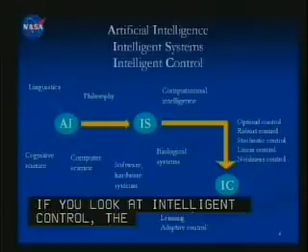If you look at intelligent control, the concepts in control are very old, maybe 400, 500 years old. But the ideas that intelligence is drawn from are relatively new, starting with artificial intelligence. Artificial intelligence as an idea is about 50 years old, and it has taken many elements of cognitive science, psychology, philosophy, and so on.

And of course, computer science came along to boost its applicability to many different current engineering systems, and that gave birth to this idea of intelligent systems. Many folks will consider intelligent systems as a kind of rational artificial intelligence, trying to make machines perform better than what they are capable of.

Some of the ideas in intelligent systems that are new and not so much in traditional AI are the idea of biological systems, looking at biology as an inspiration, also modeling abilities. Software and hardware revolution has taken place that's made implementing some of these very complex algorithms much easier. And finally, intelligent control does have traditional control features such as robust control, optimal control, but also has brought in some of the new ideas in predictive, adaptive, real-time optimal, and learning and planning down to an implementable level in hardware and in real systems.

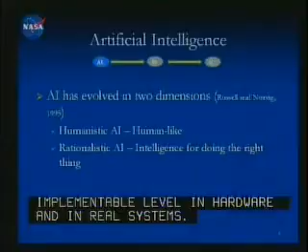AI, like I said, is quite old compared to intelligent control. It's evolved into two areas. One is looking at humanistic AI, trying to model humans and understand how humans think and behave. But the one that is closer to an engineering application is the rationalistic AI, that is using what we know about intelligence to do the right thing from a machine point of view.

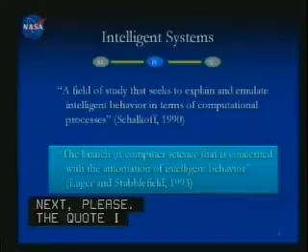Next, please. The quote I like shown at the bottom that's more relevant to intelligent systems is the branch of computer science that's concerned with the automation of intelligent behavior. So how do you automate the intelligent behavior as we know it to make the machines better than what they are?

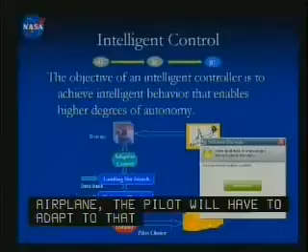It's a good way to illustrate higher degrees of autonomy. We do have a pilot in the loop, and the airplane suffers some kind of damage or an upset condition. A typical current generation airplane, the pilot will have to adapt to that condition, and sometimes the time frames can be quite small, down to almost a second type adaptation. So the pilot has to work harder, and in addition to that, he has to manage his resources, so there is quite a bit of workload on the pilot.

Now, when intelligent control comes in, the first thing it can do is adapt to the damage, provide stability. Stability is one of the events that needs to happen down to sub-second levels, and that takes away some workload right away. So that's one degree higher autonomy—the pilot is not really directly controlling that aspect of it.

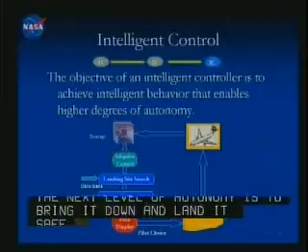The next level of autonomy is once the airplane is stabilized, we still have to bring it down and land it safely, so there are many little pieces that need to happen. One of them is trajectory planning. Now that I have a reduced envelope after the damage, the aircraft needs to figure out what it has and come up with a plan that will safely land the aircraft. So here is another level of autonomy that's provided to the pilot, and the pilot can then opt to either use it or not use it. And that's the idea of having that variable autonomy as an option to the pilot.

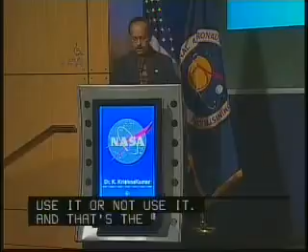So intelligent control, once again, I think of it, the objective is to achieve intelligent behavior that enables higher degrees of autonomy. This may be more relevant to aircraft as a definition, but that's the field that I work in, so it fits well. I will also show you—can you go to the next slide, please?

There are other ways to quickly define intelligent control. I'll show you a couple of ways you could do it—these are the ways I've used to communicate. If you look at controlling any system, we need two error signals. We need to get an error signal that shows you what is the difference between desired and the output of the system.

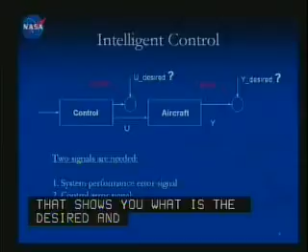So sometimes even the desired is not clear. That's where the goals come in, the planning comes in, and even intelligence can play a role. And once we know what we want to achieve, how do we get that in control? What is the error in the control activity? So that's another signal. Intelligent control can be thought of as a way to generate these signals to achieve higher intelligence.

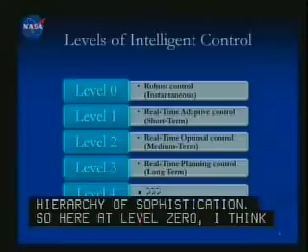Another way I've used to define intelligent control is using typical levels you might have seen in many areas, shown as a hierarchy of sophistication. At level 0, I think of it as robust control, which is kind of an instantaneous gain feedback controller. At level 1, you are adjusting the gains of the feedback to get better adaptation to the current situation. From level 1 onwards, it's almost happening in real time - online, with error correction, optimality, planning, and so on.

This level you can keep going further down or higher up to achieve higher intelligence. We have used this hierarchy when we guide our research in intelligent flight control.

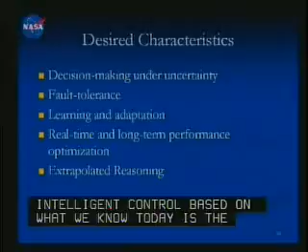Some of the desired characteristics of intelligent control based on what we know today are decision making under uncertainty, fault tolerance, learning and adaptation. The 4th bullet is a very interesting concept - it's playing a bigger and bigger role, which is where, towards the end of the presentation, I'll talk about brain-like intelligent control. That's where we want to go: real-time and long-term performance optimization.

Can I optimize as I'm flying? These are very applicable to even space travel, for example, where if you have onboard capability to sense the trajectory, then you can do long-term optimization. And finally, extrapolated reasoning.

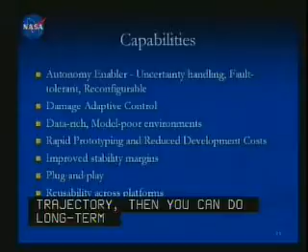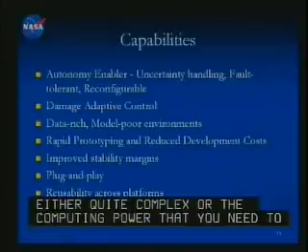So some of the capabilities we are after: autonomy enabler, I already mentioned that. Damage adaptive control. The 3rd bullet, data rich, model poor - I think you will see more and more that sensing is sometimes easier than physically modeling an event, mainly because the physics is either quite complex or the computing power needed to model that physics may not be available for real-time applications. So sometimes it may be easier to sense and control based on what we sense, similar to what biological systems do, and intelligent control as a capability has that aspect to it.

Rapid prototyping and reduced development cost - I can say from my experience, I can go from one aircraft to another, completely different classes of aircraft, and design an adaptive intelligent control in a matter of days. So that kind of quick prototyping is possible. Improved stability margins, that's one of the aspects of safety we are going after. And I'll talk about plug and play and reusability.

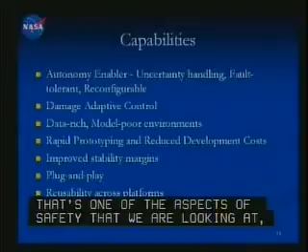Hopefully that gave a feel for what intelligent control is and what we are trying to achieve in terms of capabilities using intelligent control. So next few slides, I will talk about applications to aviation safety and next-gen designs.

If you look at aviation safety, of course, it has many requirements. Control is one piece of that solution. But in terms of control, what are we seeking? The capability we are looking for, if I have to say it in one word, is safe landing - kind of bring it down and land it safely. But to achieve that, we need to first understand stability, because that's the first thing that needs to happen. I should be able to recover from loss of control, in the sense understand how to maneuver the aircraft, and at the same time provide handling qualities that are consistent with what the pilot expects, so there is no confusion while doing all of this to the pilot.

The motivation is simple. I've shown 3 pictures here, but you can get many pictures out of the web of incidents and accidents that have led to the desire to help the pilot. Fortunately, in 2 of these, the pilots survived and brought down the aircraft quite well, because they had the time and the experience to do it. The third one, the tail damage one, did not survive.

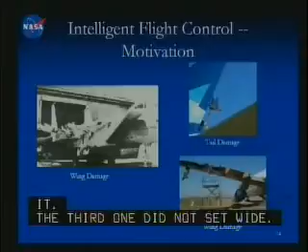The essence here is to understand that pilots who are trained can bring down most of these incidents, but there is no real ability to train for all types of incidents that might happen. The other aspect to safety is that many of these aircraft are built with redundant controllability, and we want to exploit that. So hopefully in the next few slides, I will highlight how we can exploit that.

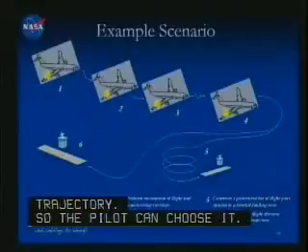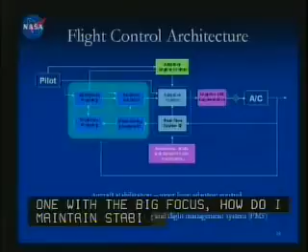How do I provide extra stability? But there are also questions like, can I use the engine as an extra effector? How do I have to design or redesign the engines to provide me an ability to control the moments from a stability and maneuverability point of view, beyond what is available right now?

And you see at the big block, which is all of the planning functions. I need to be able to do guidance, emergency planning, trajectory planning, and so on. So next, please. The next few slides I'll concentrate on adaptive control, and also on emergency planning. So those will be my two topics I will talk about. Under Resilient Aircraft Control Project, we are looking at all aspects from this architecture.

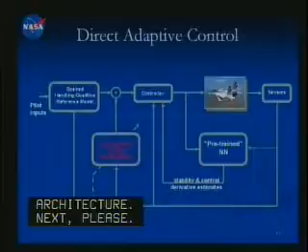Next, please. So this is one of the popular adaptive control architectures that came out of the research by Dr. Tony Calise at Georgia Tech. It's called the direct adaptive control architecture. It uses a neural network, that's in the red block there, to adapt to unforeseen events.

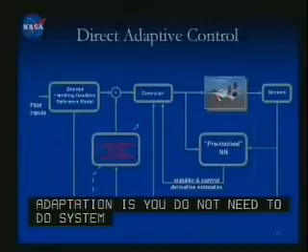The beauty of this direct adaptation is you don't need to do system identification. You don't have to spend any time IDing or identifying what has gone wrong with the system. And the benefit of that is it can accommodate many different types of incidents, not just wing damage or tail damage, but any combinations of that.

So it has a pre-trained neural net, or if you want to think of it as just a function that captures known dynamics before the fault happens, before the damage happens. So this is the current knowledge of what the system can do. And on the left, you see desired handling qualities.

So the pilot, when he interfaces with the airplane through the stick, is actually asking for desired roll rate, pitch rate, yaw rate, and through an expectation model, what we call the handling qualities model, what kind of a short period or the Dutch roll he expects. And typically there is a controller that takes that input, shapes it into control surface deflections that go to the airplane. And on the right, you see the sensing taking place.

Now at the bottom, we had those two components, the fixed neural net and an adapting neural net. Neural networks were used because they have their own nice features. I don't have time to go through that, but you can also use any parameterized function instead of neural networks.

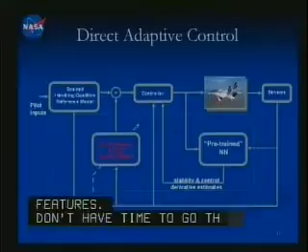Now, what we have done so far under the current safety project and previous projects is we have researched this architecture quite a bit. So some of the results I'll show you today include flight test results that were done at NASA Dryden, and some of the simulation work that was done at NASA Ames and Langley.

Now, let's move on to the next slide, please.

So if you look at the flight test results that were done so far, it uses an F-15 currently available at NASA Dryden. It's tempting to think of the F-15 as not very relevant to transport aircraft, but the beauty of it is you can take it to the edge knowing very well it's got the performance to come back.

So you can experiment with the high performance aircraft, all the features you're looking for, much more safely, since we have a pilot in the loop, than you could with the actual transport aircraft.

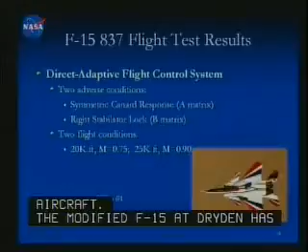The modified F-15 available at Dryden has two canard surfaces, the two surfaces in the front. Those are scheduled as a function of angle of attack, so we can actually modify that scheduling to create instability in the system.

So that's what we did. We took the multiplier that multiplies with angle of attack to the canard surface and messed with it, changed it to make it unstable.

What I'll show you is the video first, and then I'll show you a set of data. In the video, we have a short clip where you'll hear the pilot talk through what he's doing. As a quick preview, the first part you'll see is flying with no adaptation, in other words, no neural networks.

And in the second phase, he's flying with neural networks, or with adaptation. You'll see through his commentary what he thinks about the handling qualities. So this video will highlight the handling qualities from the pilot's perspective.

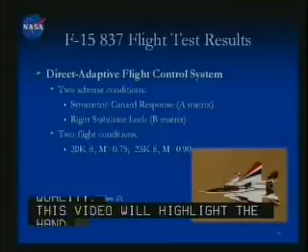And then I'll show you a set of data that highlights the stability as control engineers would like to see it. So it captures both the pilot-in-the-loop effect of adaptation and the stability.

Now, I do want to point out there's a temptation to say we could do a lot of this experimentation with unmanned systems, and that's true, we can do a lot of it. But when there's a pilot in the loop, it completely changes everything, because now we are getting into a realm where there are two systems adapting, the pilot and the software.

That interaction is poorly understood, and through experimentation we figured out even we don't fully understand it. Pilot-induced oscillation is one of those events that are not desired, and that's the thing we want to avoid when both the computer and the pilot are adapting.

So with that, let's move on to the video, please, and I'll keep quiet through the video.

Here comes the failure. Okay, failure's in. Just right at the edge of desired tolerances there, so we made it still. One more, a little bit aggressive. Same thing, right on the edge. I'm overshooting a little bit from where I want to be. Still making desired tolerances. Here comes one aggressive one. Okay, a little bit light in the seat. Here comes the failure. Okay, a little pitch up there. No PIO tendency, and just stopped it right in the middle of the position where I wanted to. Let's do a high to low here. Okay, perfect. That stopped exactly where I wanted it. Let's do one more. Okay, right in there. Actually, it seems like it's better going down. Let me try one more from the bottom position. Yeah, stopping it right there. We talked about that. Predictability, it seemed to be much more predictable with the neural networks on. Fine tracking is good. We're keeping it within about 5 mils. I'm happy with that. DV up to the north, or up to the forward. Bring the pipper back on. Okay, easily within side desired.

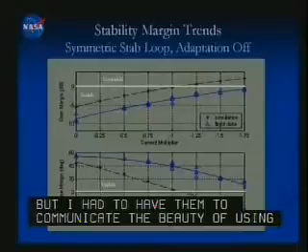I have two busy slides, but I had to have them to communicate the beauty of using adaptation. What you see is a typical control tool that we use to assess stability.

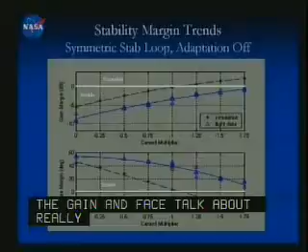This is called a Bode plot. On top we have the gain margin, and on the bottom we have phase margin. We want gain margins to be good, about 6 dB or more, and about 60 degrees of phase margin. The gain and phase talk about the sensitivity to modifications to feedback signals and time delays in signals. So the stable and unstable regions are very well marked there in white.

The blue line is the flight data. We flew several flights at various levels of destabilization, all the way up to neutral stability, shown on the right at minus 1.75 canard multiplier. The blue symbols on the line are the actual flight test data.

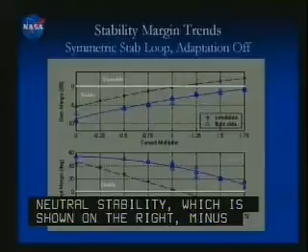Then on top there are black dashed lines. Those are the simulation data. Whenever we do our experiment, we first do it in our offices, then in a small engineering simulator, then in a full engineering simulator, and finally in the actual aircraft. The black line is a full engineering simulation where there is a pilot in the loop, and you can see the simulation does not capture all of the non-linearities that you get out of a flight test. So right there is one selling point for flight testing ideas, because you don't really capture all of the anomalies that you really want to simulate.

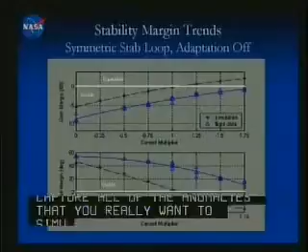In the next slide, I will show you the concept of consistent handling qualities, or consistent performance. You'll see how, when we have neural net adaptation on... by the way, this is without neural net adaptation. So when I turn the neural net back on, both simulation and flight tests will look very similar. Can we go to the next slide, please?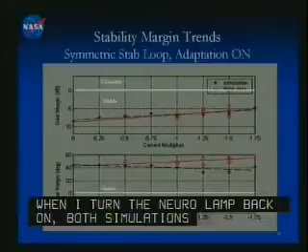Here there are two pieces of information. One is, by turning the adaptation on, simulation and flight tests behave the same. And the reason for that is the adaptation—it's adapting, making the simulator behave like the real airplane by adapting the handling qualities model, because the neural net is able to absorb all the non-linearities.

The other thing I want to point out is, the best place to see it is at the rightmost point. We have gotten back the 6 dB. Before, in the previous slide, we had 0 dB at the extreme right. Now I have minus 6 dB. So by turning the adaptation on, I got back the stability that I was hoping for.

So this is a big selling point for adaptation—you can gain back the stability that you lose by having a damaged situation. Can you go to the next slide, please?

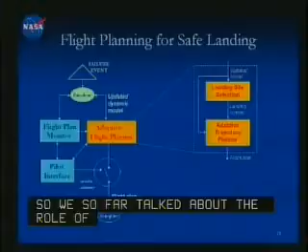So far we've talked about the role of adaptive control in providing increased stability. But like I said, stability alone doesn't do it. You have to safely land the airplane, which means I should be able to identify what I have and come up with a plan to bring the airplane down.

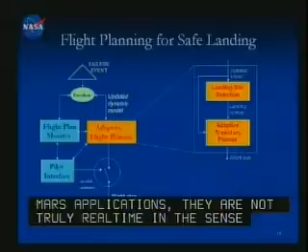Towards this, we have been working on some other technology highlighted in red, the adaptive flight planner for example. It's adaptive in the sense that it constantly and consistently gets envelope constraints fed into it, and it does real-time planning. Typical planning software, for example the ones used for Mars applications, are not truly real-time, in the sense there are humans on Earth that change the plan based on feedback. But here it's done on the fly—it gets input from the software and changes the plan.

The other nice thing about this approach is you can come up with what-if scenarios. So let's go to the next slide, please.

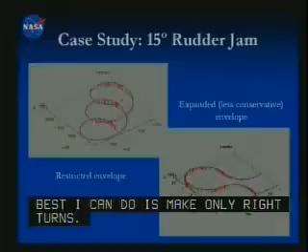Here are two examples. On the left, we have a 15-degree rudder jam that just happened, and the model estimates that the best I can do is make only right turns. The safest thing to do is make a right turn, and you can still land at the final landing area shown. Or you can relax it a little bit and come up with a better manageable path shown on the right. So the pilot could be given these two options, or maybe four or five options.

Once you are stable, now you have time to react to these options. You can say, the right one is, although maybe higher risk, I think I can do it based on what I know. So these are the trade-offs that you can do in real time, provided to the pilot to safely land the vehicle. Next slide, please.

Okay, so here is another very interesting example we looked at, and this is where I'm trying to take it to the higher levels of intelligence, per se.

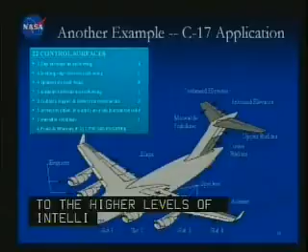I have here a C-17 airplane, which most of us know is a high performance vehicle. It's such a beautiful vehicle from a control point of view. It's got so many surfaces to play with, about 22 control surfaces, so it's like a controller's dream. But they are not all used for safety, they're used only for performance, to get high lift, high drag, tactical descent, for example.

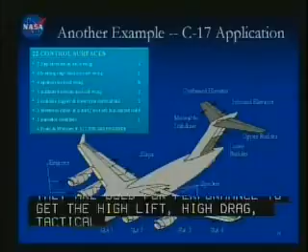So what we said was, let's try to see for a damage scenario how we can use these surfaces. But here is the challenge: it's not straightforward, there are many different surfaces with many different authority. For example, if you look at the roll control authority, you see you can use almost any surface to get roll. So how do you do this optimally and in real time?

Optimal control allocation basically looks at a performance index and tries to come up with the right set of control surfaces to actuate to give you that performance. In our case, it was simply minimum error, but you could also say minimum drag or minimum noise, whatever you want to choose as your performance. The nice thing is it does that in real time.

On the left, we have an adaptive critic. Adaptive critic is based on very classical optimal control theory called dynamic programming, the principle of optimality. What it does is it helps you do real-time optimal reference model adaptation. In the C-17, we realized very quickly that although it is highly controllable, the reference model, that is the handling qualities model, is unachievable because of the surface constraints we have. So we can actually tone it down a little bit, but how do you do that cleverly? That's where adaptive critics come in.

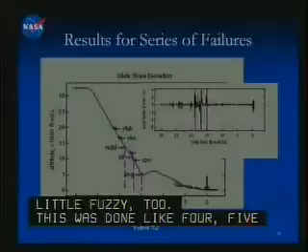I don't have too many charts, just one, and I know it looks kind of busy and a little fuzzy, because this was done like four or five years ago. But what it shows is we flew several flights in simulation. This shows one of them, where the aircraft is making a rapid descent. On the left axis you have the altitude, and on the x-axis you have time, distance to touchdown.

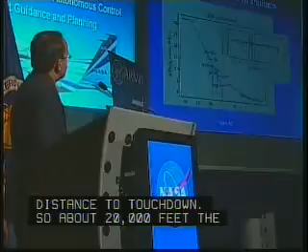At about 20,000 feet, the stabilator fails, one of the stabilators. A little later, the elevator fails. A little later, the rudder fails. A little later, aileron fails, and so on, all the way down to one engine failing. This is all happening on one side of the airplane, assuming some kind of hydraulic leak has taken place with a series of failures.

Now, the beauty was, I don't have a video that captures this, but the pilot really didn't feel a thing because it's highly controllable. So the intelligent flight control figured out the right settings to give him to keep the stability going, and he could land it all the way down.

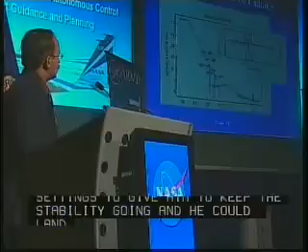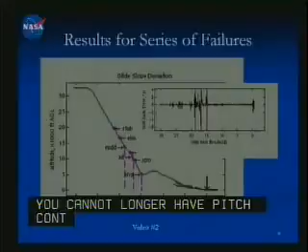I do have a video that I'll run in a minute that showcases only one thing: a tail failure. By that I mean all the control surfaces in the tail fail. In a typical transport aircraft, that is a disaster, you can no longer have pitch control or yaw control. But here, you'll see that at least from the little video I have, basically nothing changes. The tail fails and you can still fly the airplane. That was the beauty of C-17.

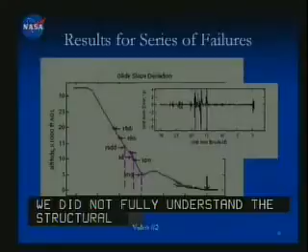Now, one other thing I want to add is that when we did all of this, we realized very quickly that we did not fully understand the structural constraints. When we move secondary control surfaces, we don't know what the effect of the aeroelastic behavior will be. So that's one other research area we are pursuing under resilient aircraft control. Can we roll the video, please?

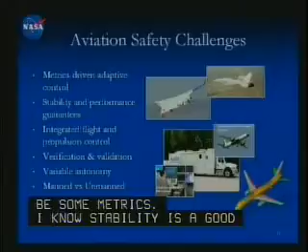So what are the aviation safety challenges? We have plenty of challenges. Number one, of course, is the idea of getting it into the real aircraft or the real fleet of aircraft. For that, we feel there needs to be some metrics. I know stability is a good metric, but adaptive control, being adaptive control, do the traditional metrics like transient, steady state, rise time, settle time, and so on - are those sufficient? Do we really understand while adaptation what happens to the actual software? So there are some metrics needed, and we should be able to show that if you define a metric, I can consistently 100% of the time do the same thing for repeatability. So that's where the stability and performance guarantees come in.

We also have challenges in integrated flight and propulsion control. How do I design the next generation engines that will give you the ability to control yaw, pitch, and roll? Verification and validation is a big problem - verification, especially since the software is quite complex. How do we do that?

The last three bullets are more towards how do we flight test this. I have manned versus unmanned systems. Unmanned is cheaper, but we don't learn the whole story. We need manned systems and they're expensive. Subscale versus full scale - so there are challenges there. Right now at NASA Langley, we are looking at subscale models that have been balanced. They have the inertia balance, so we can learn a bit more than cheap off-the-shelf subscale models.

And finally, can we use next-gen designs like the blended wing body to look at safety issues? Or is that too much to ask for since they're only conceptual designs? Should we wait for them to be more solid designs before we try it? So there are many challenges when it comes to validation.

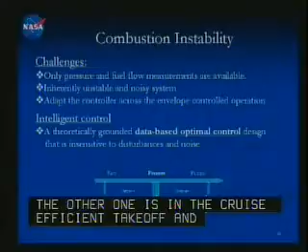Here is a challenge that we looked at, which is, I think, very applicable to next-gen as we talk about fuel-efficient engines. Engines are modeled reasonably well, but there are some phenomena that are not modeled because the physics is so complex. One of them is combustion. Combustion is a highly inherently unstable, pressure fluctuating and noisy system. So if you try to run the combustion lean, this instability will blow the flame off, and that's not good. So to keep the flame going, they run it rich, and that is not fuel efficient. So if I can provide stability via control, then I can run it leaner and get better fuel efficiency.

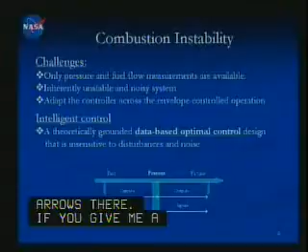But to do that, we don't have good models of the combustor itself. So how do you actually go about coming up with a control algorithm that will work well for such a situation? This is where another intelligent control approach comes in, called predictive control. At the bottom, you see a set of arrows. What it's trying to tell you is that if you give me a collection of past outputs, the present output, and past inputs, then I can predict the future up to some horizon. So theoretically, given how much you give me in the past, I can predict so much in the future. Once I can predict, I can use that to control the engine for the future. This is called predictive optimal control.

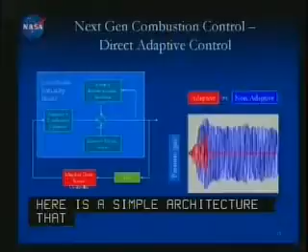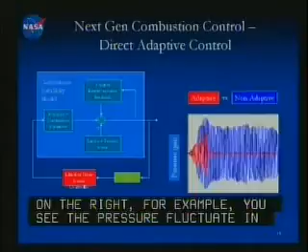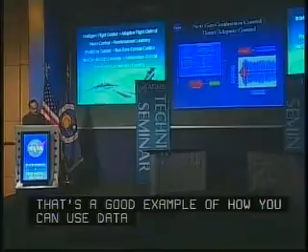Here is a simple architecture that we used. There's a red block there, which is a highly intensive mathematical computation—lots of matrices, inversion, and so on—but out of that comes a control that achieves much better stability. On the right, you see the pressure fluctuation as a function of time. The blue is a non-adaptive fixed controller, because you don't have a good model. But the red one takes a little bit of time until the data is accumulated, then it adapts and completely stabilizes the pressure fluctuations. So that's a good example of how you could use data versus model in areas where it's difficult to come up with models.

The next application is being pursued right now under the subsonic fixed wing project. The cruise efficient short takeoff and landing is a conceptual vehicle. It's got many options in terms of how you generate the extra lift, using the engine, blowing air from the engine. All of this physics is being studied in wind tunnels and so on—it's quite an intensive effort to understand the designs from the physics point of view. So one aspect we thought of was, can I do this without a good physics model? Going back to data versus physics: if I can sense what the airplane is doing, can I use that to control with limited physics-based models?

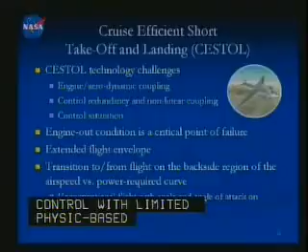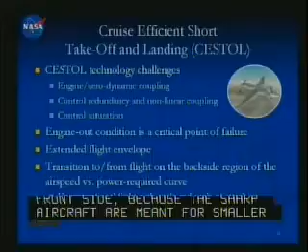Some of the control challenges are listed here. There's a strong engine aerodynamic coupling in CESTOL vehicles. There's plenty of control redundancy—not all for safety or performance, some are simply used to provide extra lift, but can we use that for control? There's also the transition to and from the backside of the power curve to the front side, because these cruise efficient short takeoff vehicles are meant for smaller runways, which means you have to fly slower as you come down to approach. How do you achieve that, and how do you provide the safety and performance for it?

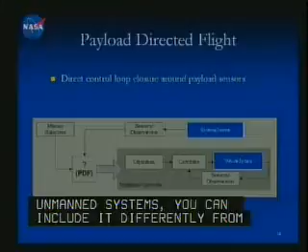This is one of the applications for unmanned systems. Like I said earlier, intelligent control for unmanned systems lets you think very differently from manned systems—all of a sudden you can open it up and think of new ideas. The whole concept can be better explained in the next slide, but before we move on, the dashed line there is the payload-directed flight block. That's the research—how do we come up with that?

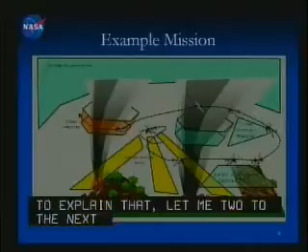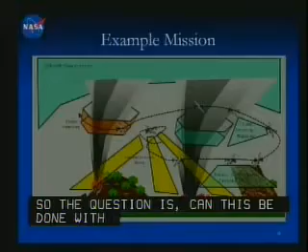Here's an example mission. Being from California, I think it's clear that fighting forest fires is one big challenge we have. Right now, manned aircraft help, and also unmanned aircraft for surveillance, to actually map out that region. But the question is, can this be done with real-time planning and control? That is, can I use an unmanned system that has a sensor on board that can detect fires, go to those regions, map it out, and maybe eventually even help with putting out the fire itself?

So how do we achieve this kind of intelligence on board? Typical autopilot systems will have altitude hold, speed hold, climb, or descent. But in this application it may be combinations of them. It may be something where the sensor says, give me a flight profile that will keep constant infrared signal or constant thermal signatures. As soon as you start speaking sensor language, the interface from the sensor to the actual control on the unmanned aircraft gets complicated. So how do you make that simpler?

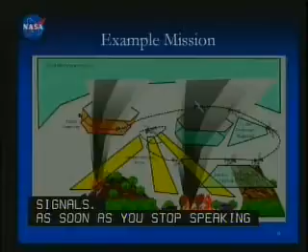So we are looking at some of the intelligent flight control concepts here. On top, you see multiple autopilot modes, very different from conventional modes. Instead of altitude hold, we say waypoint hold - you just follow the waypoints. Or we can say contour hold - you want an image contour and hold that image contour. Or you can say thermal signature hold. So how do you take that kind of command from the sensor and translate it into control?

To be beneficial, it also needs planning and feature extraction as one of the key components of intelligent control.

There are many applications of payload-directed flight - we all know that. Some new ideas for airspace applications involve formation flight, which is shown to reduce drag. So how do you achieve formation flight, keeping two airplanes purely based on sensor feedback? And also futuristic unmanned cargo aircraft - how do you keep them in profiles that are low noise, non-interfering type trajectories?

Okay, so hopefully I gave a flavor of the research being done at NASA in aviation safety and NextGen. What I want to do in the next 10 minutes is talk about some future ideas. These aren't directly funded by anyone, but they're concepts we as researchers always look for to pursue.

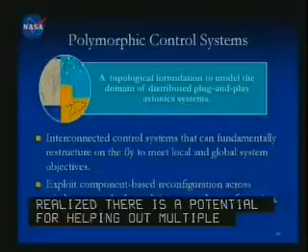As we started working with intelligent control, we soon realized there's potential for helping out multiple unmanned systems. For example, let's say I have a couple of UAVs flying along and a bunch of unmanned ground vehicles coordinating a task with the UAVs. How can I share resources across wireless networks? I may be able to use a sensor from a ground vehicle for control on the aerial vehicle. So we built a mathematical architecture using topological formulations for sharing data across physical boundaries.

All the applications I showed were using within the physical boundary - I have an airplane, one actuator fails, I'm using the other actuator. But here I'm going across the boundaries, exploiting the wireless networks and networking capabilities that we have.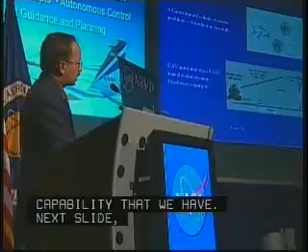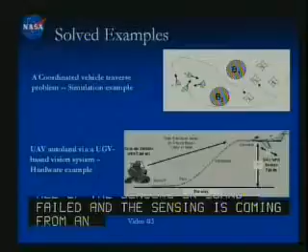So we have looked at two applications. I'll talk about the bottom one because I have a short video of that. Here is an example of how an unmanned aircraft signals saying it has a complete INS failure, which is the inertial navigation system failure. Then a ground vehicle moves into position, identifies the aircraft, and visually tracks it, giving that information back to the airplane and helping guide it down to landing. So all the sensors on board have failed, and the sensing is coming from an unmanned vehicle that's stationary on the ground. The video I'll show you was flown at NASA Ames using a Cessna scale model and a rover.

You will see as the aircraft is coming down to land, it's totally unpiloted - it's autonomous. Towards the end you'll see the rover's position as it's watching the aerial vehicle. So here is another example of where intelligent control can play a role across physical boundaries. Can we roll the tape, please?

Okay, so that's the UAV. It now signals to the rover that something has gone wrong - it's got a failure. And from now on, the rover actually guides it all the way down to flare and touchdown. I was told one of the uniqueness of this is it actually flares, as you saw there. Typical autonomous flight down don't flare - they just crash land.

So hopefully you got to see the rover as it went by - it's a little rover that was sitting on the side. Okay, so we have done interesting experiments. Again, these are kind of unfunded, so not real good videos here to show you. Can we move to the next slide, please?

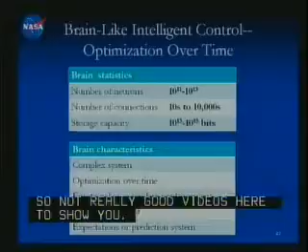Okay, so this I think is the exciting future of intelligent control. If you look at the brain statistics, just the numbers of what we have - 10 to the power 13 neurons, that's 1 million trillion neurons. And if you assume these connections are storage, we have something like 10 to the power 15 bits of data that we store.

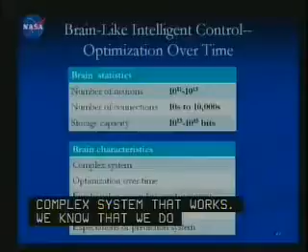Another thing we know about brain characteristics is it's a complex system that works. We know that we do optimization over time - we are always planning ahead. We have emotional or secondary reinforcement, and we have an action corresponding control component, and we also have an expectation system. So the question is, how do you take these concepts and try to build a machine that can move towards brain-like intelligent control?

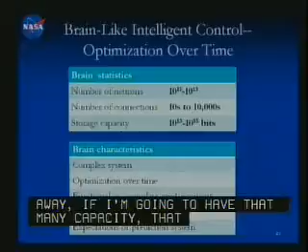One thing we are going to see right away is that if I'm going to have that much capacity, it has to be modular. So neural networks is one way to do it. I repeat the neurons - I can test one neuron and then say I have billions of neurons working the same way, so verification becomes easier.

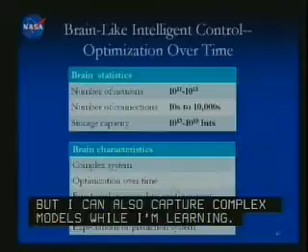But I can also capture complex models while I'm learning, so there's no way I can sit and program a 1 trillion memory in hardware - I have to do online learning. So I have neural networks and online learning, and I have ability to capture the optimization over time, the predictability, and the secondary reinforcement. Can you move to the next slide, please?

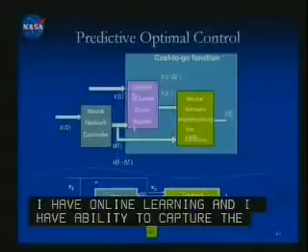So here is an architecture in a very simplistic way. Buried under that is a bunch of equations and neural networks. And these have not been proven to do much else - I mean, so far people are researching that, and we are looking into that too.

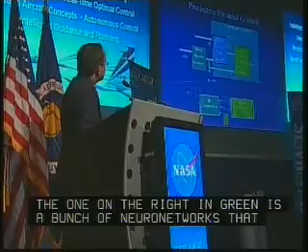So what it has is a 3-component box here. The one on the right in green is a bunch of neural networks that capture the performance over time. The blue one is the prediction model - a bunch of neural networks that sits and predicts, models the future times. And then we have a controller. At the bottom, I've shown you in a cartoonish way how you can adapt the controller online using some ideas from optimal control. Can you go to the next slide, please?

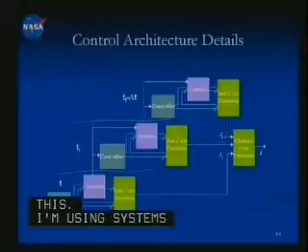So here is something - if you actually open it up, it may look somewhat like this, that I'm using systems from T minus delta T to predict T and down to the current time T and future times. So this can very quickly unravel into something complicated. So what we are looking at, in a very minimal way, is how do we come up with, in the simplistic way, maybe a 3-neuron architecture that can do control, prediction, and reinforcement, and then multiply it several million times to get the power of brain-like intelligent control.

Some of the applications we have talked about in the past, for example, low thrust trajectories. If I can have spacecraft self-locate itself instead of using the deep space network, then I can come up with trajectories that are self-correcting. And since we are talking about months of travel, you need to have brain-like intelligent control for long-term optimization and control. So how do we achieve that? Through intelligence or intelligent control.

Next slide, please. So the final idea that we have pursued, and I think it's got potential use going into the future - one of the aspects of any complex software is verification. Verification cost is skyrocketing because every line of software adds to verification cost. So there is a desire to do some of this in hardware. So when we say hardware, can I come up with a verified hardware that I can use on any system?

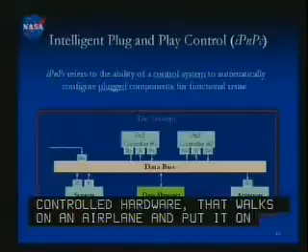So that was the question - can I take a hardware, a control hardware that works on an airplane, and put it on a rover? Will it work? So we took this concept and actually applied it to different systems. Let me show you that next. Can you go next slide, please?

So here is conceptually what we can have. On the right side is a platform, on the left side is a hardware. They do a handshake and pick the right control block to run the controller. Can you go to the next slide, please?

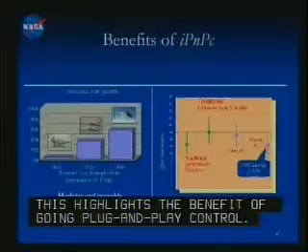Again, this highlights the benefits of going plug-and-play control. We did a study with SRS Technologies, I think they're called Mantech Systems now. They looked at adaptive control and how much cost savings there could be, and found through quantitative study that compared to traditional gain scheduling, you can save 23% of the cost for avionics software. So our push is that if you really go down to repeatable, reconfigurable hardware, we could save a lot more money, mainly from software development, but also in verification costs.

Next slide, please. I'll show you very quickly four applications, and the only thing I'm trying to motivate here is that the architecture really doesn't change much when I go from an aircraft to an unmanned aircraft to a ground vehicle to a space application. So it is there, we have the tools, we just have to make it happen. Next slide, please.

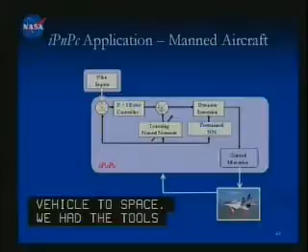Okay, so concentrate on the IPNPC block there. It looks the same from this slide to the next slide to the next slide. And these are all examples that we actually did — not just conceptual architectures, but we actually have used this.

Next slide, please. Okay, this brings me to the last slide of the talk. Hopefully I gave you a flavor of what we are pursuing under aeronautics from a safety and next-gen point of view, and also some future ideas that we are getting into in a small way to understand the capabilities of intelligent flight control. But we do have a lot more challenges.